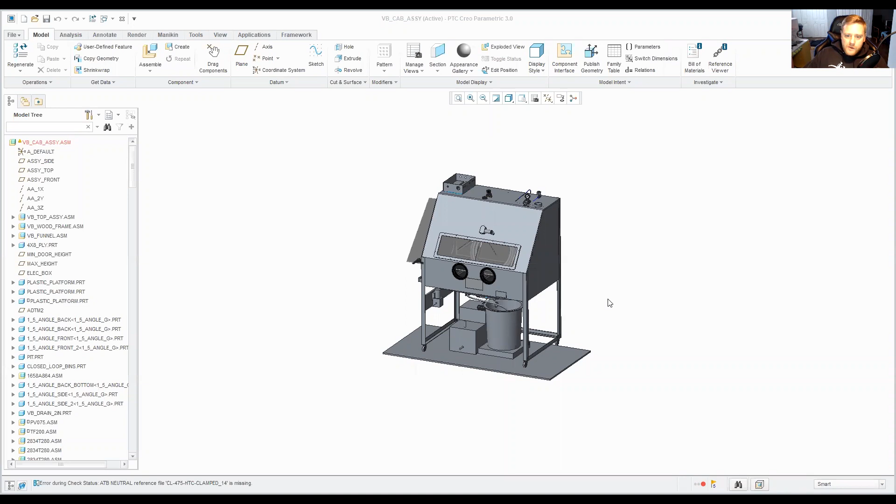All right, so here it is. This thing's huge. Let's look at a front view here. So it's 60 wide, 40 deep, and I made it 44 tall.

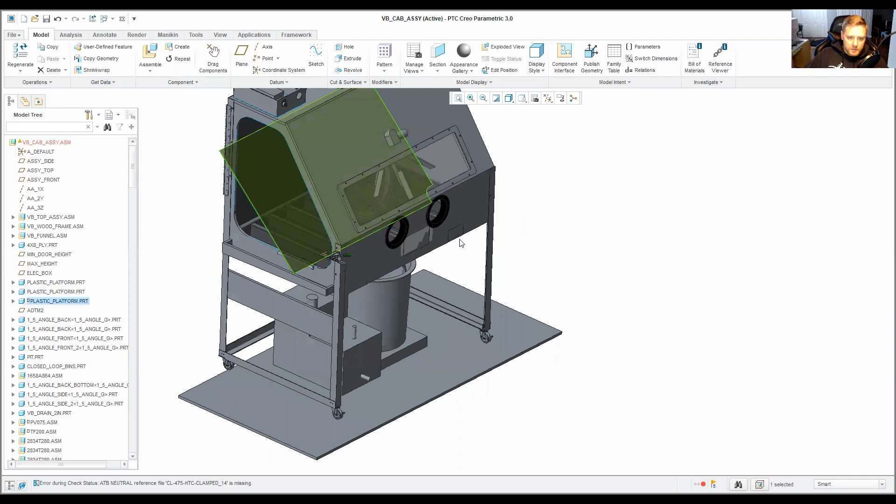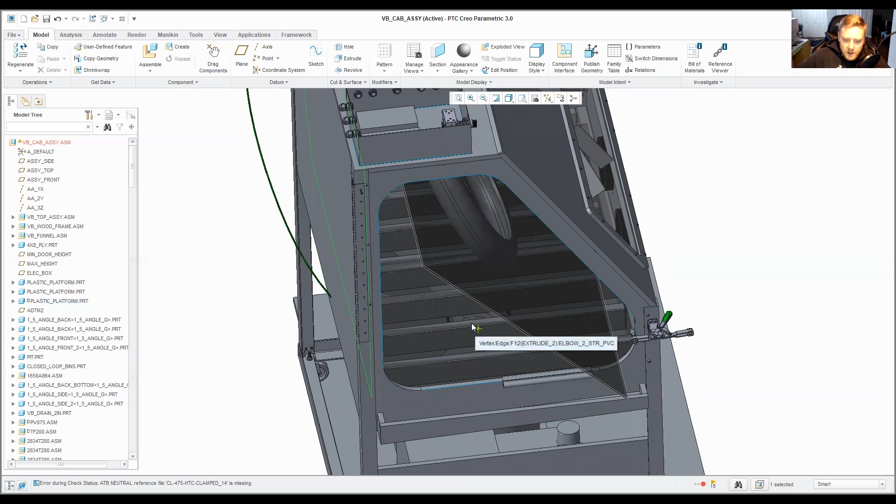And the reason is, let me show you. If I hide the door, this is the platform, right? It needs to be able to go in and out of the door, obviously. But what I like to do is, see here, it's in the down position for normal blasting, but I like to tip it up here for maintenance and cleaning. So let's say you want to get down in here and mess around with the fittings, the hoses, the drain, maybe you dropped a part or whatever. Instead of taking the whole platform out, you lean it up against the back wall. So that's why I made it 44 tall. If you want it shorter, let me know, but then you won't be able to do this with the platform, obviously.

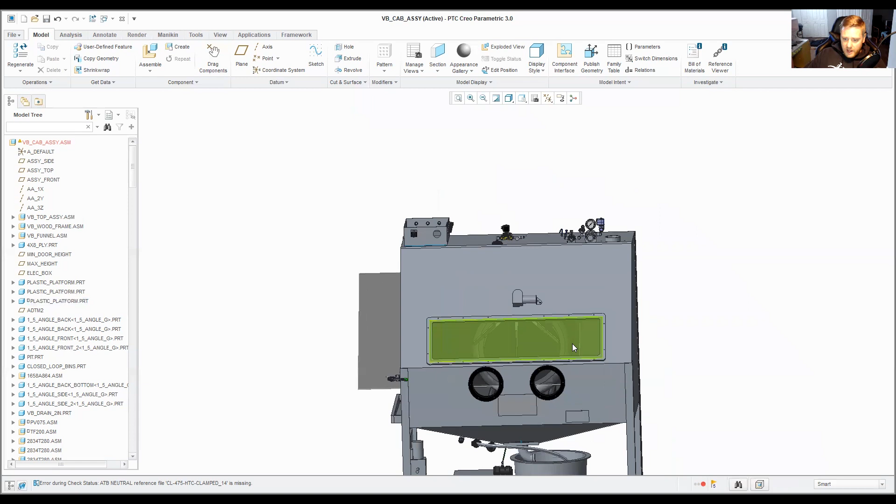Okay, the glass and the frame are wider. It's going to be up to you whether you want 2 holes for one pair of gloves, or 2 pairs. So you can punch 4 holes in the front here, put 2 pairs of gloves so you can work on the left side of the cabinet, then bounce over to the right, or whatever.

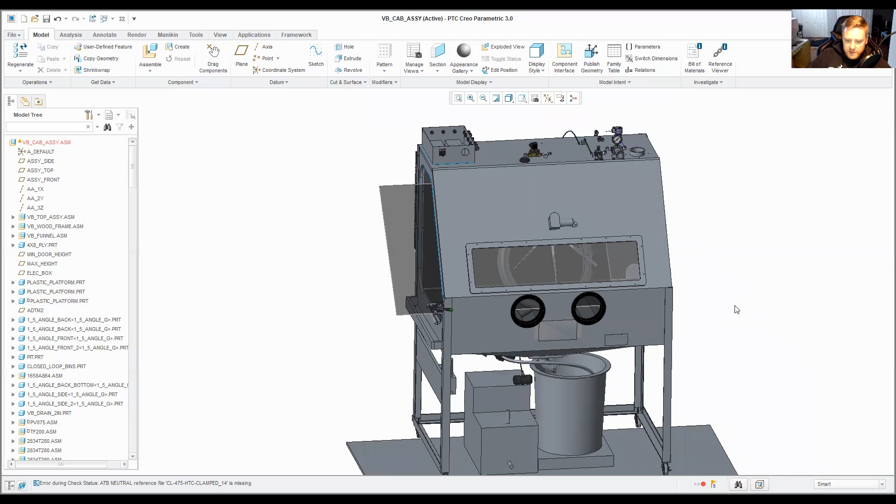So that's all cool. One thing is this thing gets pretty tall. So if I do a measurement here, from here to the floor, this thing's the floor, that's 80 inches tall. So over 6.5 feet tall.

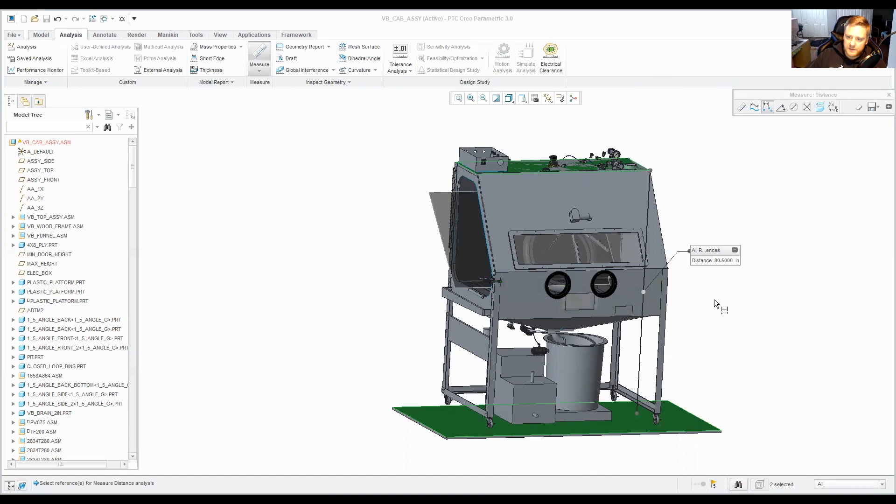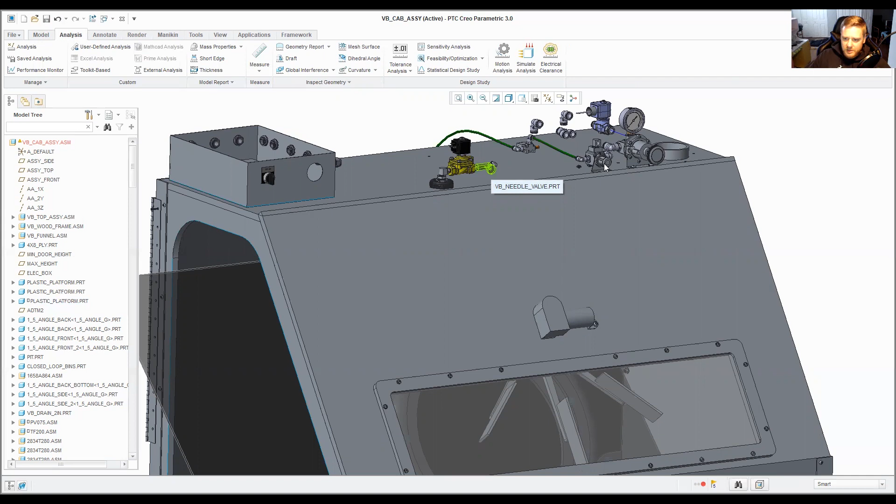So right now I have the regulator up top here. You're probably going to want to move that down. Maybe you can bolt it in this general area. I'll leave that up to you guys as well. The window rinse knob, you probably adjust it once and forget it. Same with this other regulator for the closed loop.

One thing about the wood frame, let me open the wood frame real quick. What I did is I put 2 2x4s in the center. And the reason is, in case you get platform material in 4-foot widths, you could actually do 2, and this would be split here. So this is optional. Obviously you can put 1 2x4 here or 2, and then you could put 2 pieces of platform instead of 1 large one. It just depends on how you buy it and where you find it, what you use.

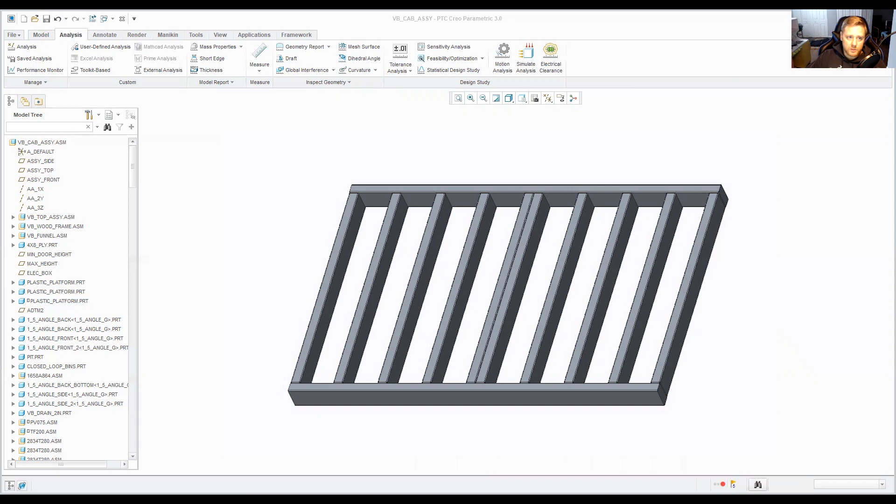So that's that. All right, so here are the 2 machines side by side. Obviously here on the right is the 42 by 30 by 33 tall, interior dimensions, 33 tall. Again, if you look here, here's the platform standing straight up. So that's kind of what drives the height.

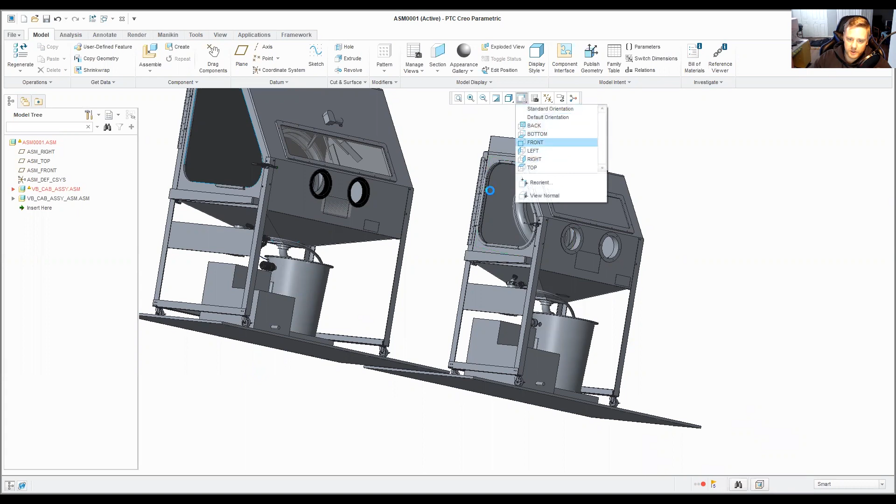I could obviously, this one kind of looks kind of ridiculous, actually. There's a lot of space here, and the window is 12 inches tall, so you can't even see up in here. So maybe that's why I'm doing this video. I need some input from you guys. Do you want me to shrink down the height a little bit?

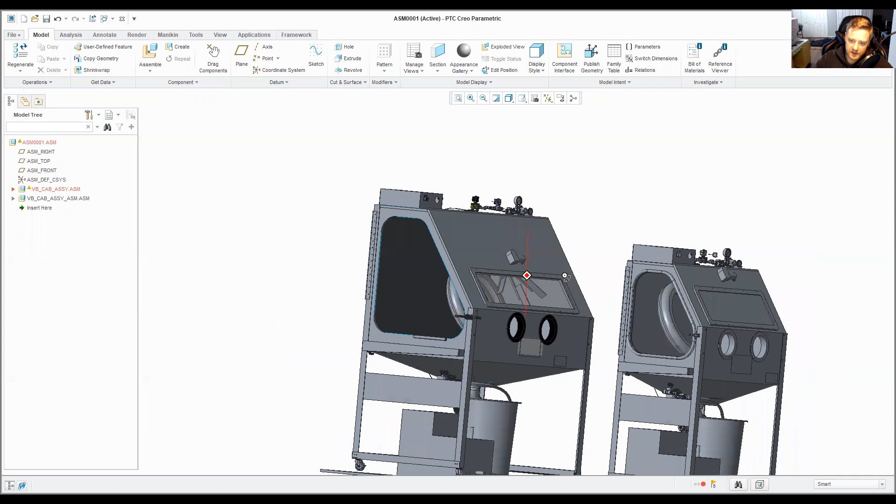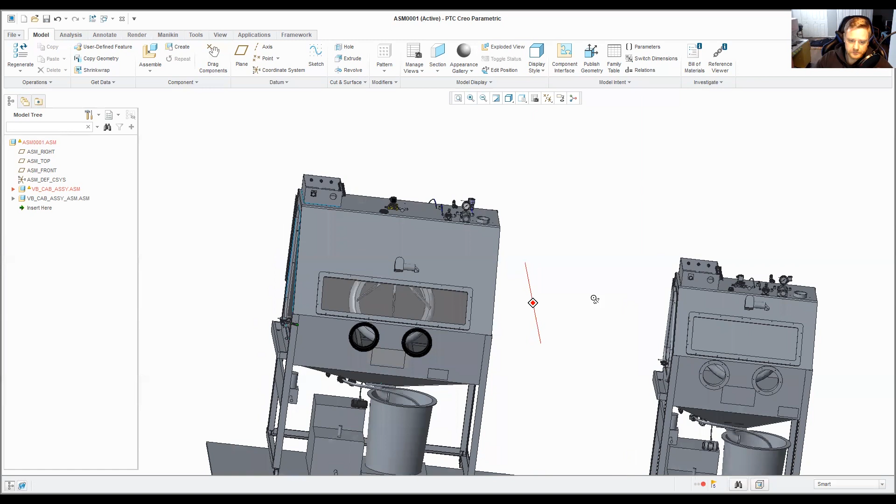Because, well, it's kind of tall, it's 44 on the outside. So like I said, 60 by 40 by 44, and those are external dimensions. You're going to have to take off roughly 2 inches for the internal dimensions - for the length and width, 2 inches, and for the height, just 1 inch. So anyway, there it is. It's a lot bigger. Let me know if this is what you guys want, and I can whip up some prints in a few weeks and get it out in a set of plans. Very minor changes.

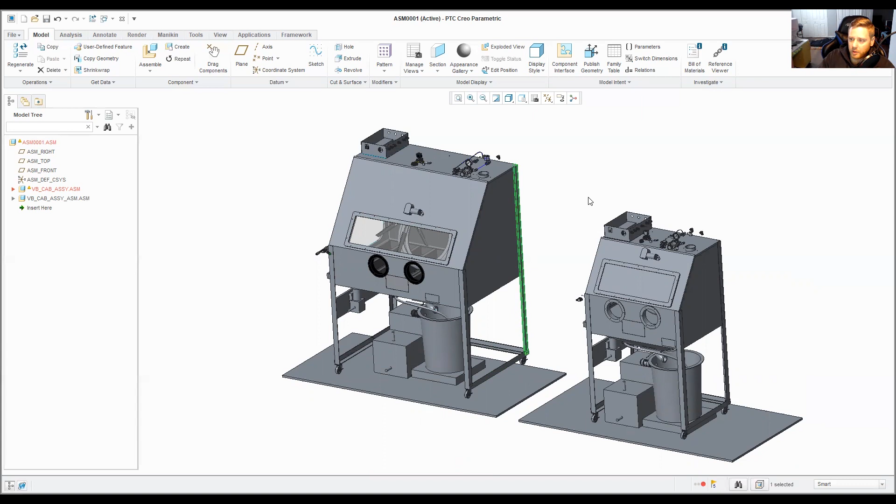I also have to update the parts list. There's a larger glass and bezel. These legs get longer, both for the sides and the backs - excuse me, the backs here. They're available in longer lengths as well, so it's no big deal.

So that's pretty much it for this video. Real quick, I just wanted to review the model. Also, I got a little bit of feedback.

Someone else suggested another size, a 48 by 40 by 40, I think it was, or 48 by 36 by 36, I don't know. Regardless, it's easy to make a new size and whip up some prints. So we just have to agree on some sizes, and then I can upload it to the plan. So feel free to request any size that you would like.

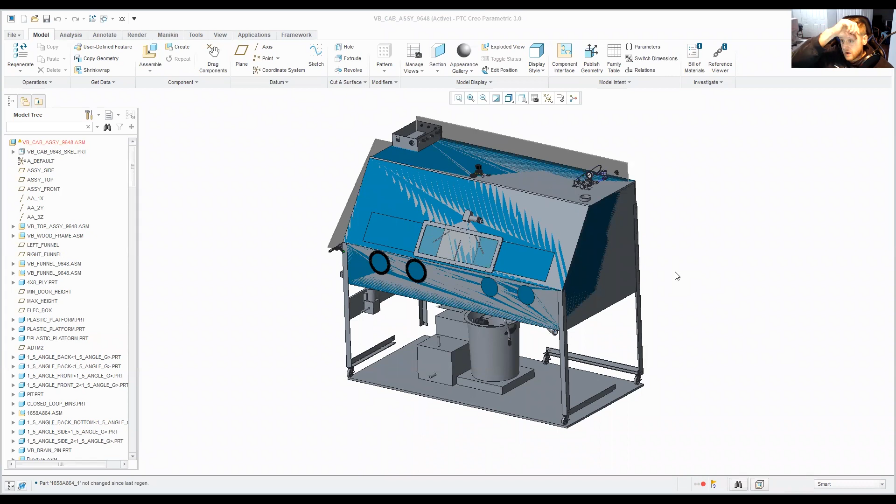Before we go, let me show you really quick - I've been working on an 8 by 4 by 4 foot cabinet. Let me quickly show that. All right, so real quick, check this out. I would love to build one this big. I don't know when I'll get to it this year, but basically this is 96 by 48 by 48.

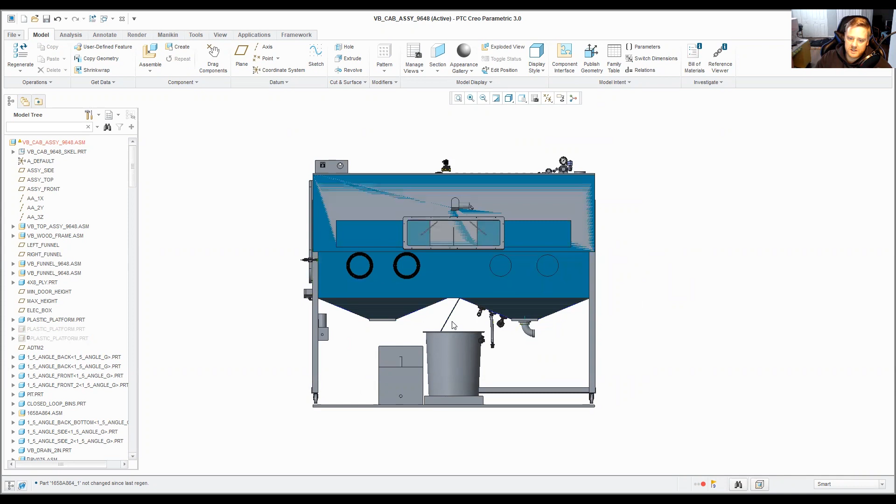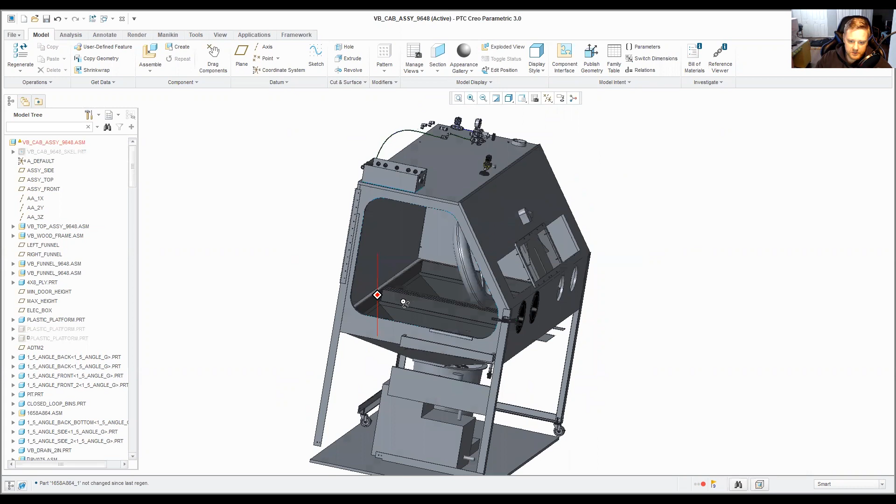Let me hide a couple things here. These are the platforms just sticking way out because - so if you look here, I thought about doing 2 funnels, and there would be some plumbing under here to tee it together and then dump it right back into this pit centrally. Something that we'll probably need here is a couple legs in the middle, or 1 or 2 legs in the middle, because this thing's massive - 8 foot long. So anyway, I started messing around with this model. Let me hide this, but you can see it's just freaking huge. And there's 2 funnels in there.

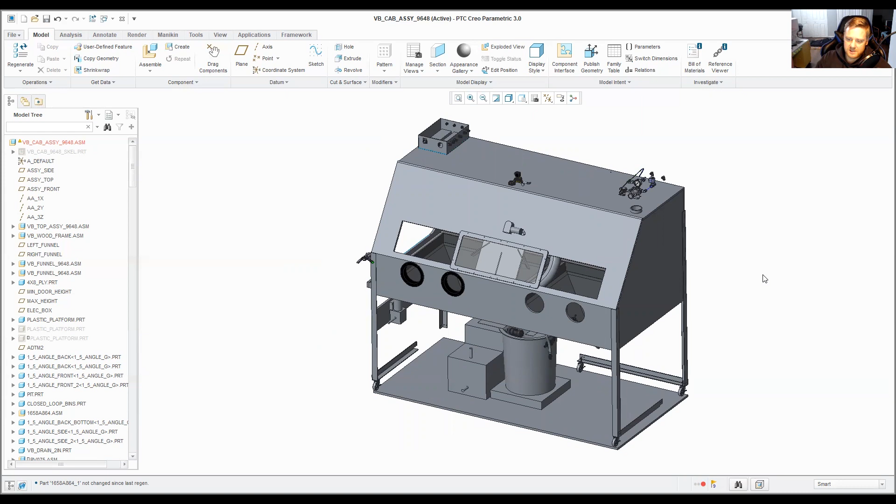So yeah, this would be pretty cool to build and show you guys how to do it. And you know what, the plans currently have all the building techniques in video to pretty much build any size. Wood is scalable. Everything I go through in the plans will show you how to build any size. The only difference being is the dimensions on the prints and how you cut them. And then obviously these beveled cuts are tricky to figure out, so I do that in CAD and it comes out perfect. So anyway, it'd be pretty cool to build this. You can see that under there. So that would work real nice.

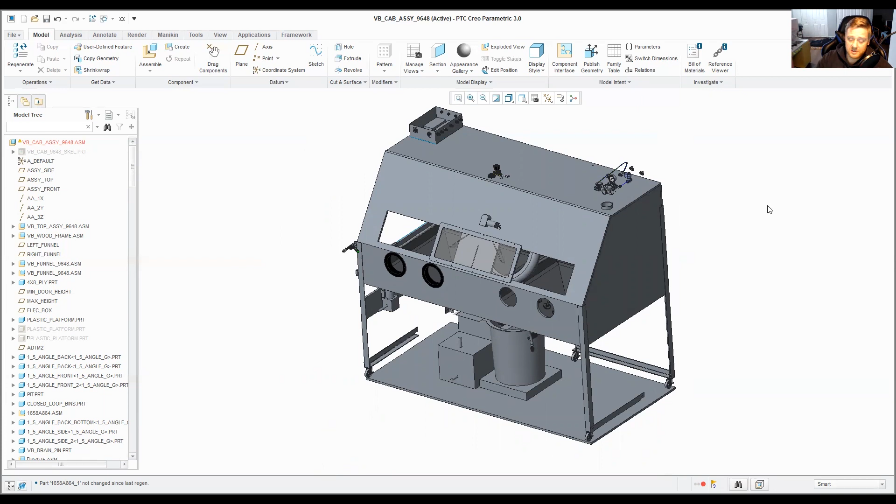Anyway, just something to think about if anyone wants to build a huge ass vapor blaster. I might be able to do this later this year and come out with the plans. All right, so that's it for this video. Comment below on the 96 by 48 by 44 - if you guys want it a little shorter, let me know. I'm not sure what kind of frames you guys are fitting in this, but just give me some feedback. All right, thanks.